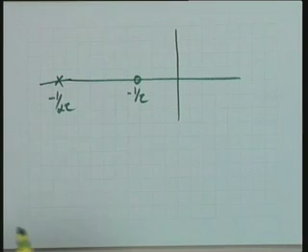Recall a lead compensator has both lead and lag as a pole-zero pair. In the case of a lead, there is a zero followed by a pole, and in the case of a lag, a pole followed by a zero, as far as the left half plane is concerned. Let me sketch this: a compensator zero, and at a sufficiently large distance, a pole. If I consider this to be 1 over tau, this would be minus 1 over alpha tau, with alpha less than 1. The transfer function of a lead compensator, call it d(s), can be taken as (s + 1/tau) over (s + 1/alpha tau), with alpha less than 1. Let me go ahead with the lead compensation; I'll come to lag compensation after that discussion is over.

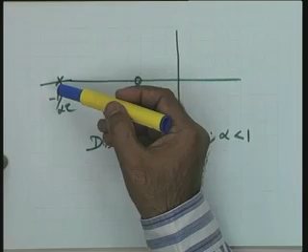We have seen in the root locus method how to place the zero and pole appropriately so that the transient performance of the system is improved. That was the objective. We used to pull the root locus towards the left so that it passes through the desired point, corresponding to the desired closed loop poles, which corresponded to zeta and omega n.

Now let us think in terms of the frequency domain. If zeta and omega n are specified, using second order correlations these indices have been translated to phase margin, MR, omega b, or equivalent indices.

In my examples, let me take phase margin, kV, and omega b as the three important specifications, and any other specification could be checked whether it is met. If a specification is not met, you have to enter the design cycle, take another trial point, and make the calculations again using that new trial point.

So now I want to go ahead with the design of d(s), that is, getting the values of tau and alpha so that performance requirements on kV, phase margin, and omega b are satisfied.

In addition to the flexibility on tau and alpha, I also have flexibility on the gain, since I can put an amplifier stage with the compensator. So instead of 2 parameters, we actually have 3: Kc, tau, and alpha.

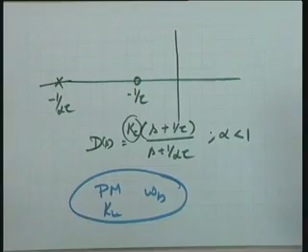As we did in the root locus method, I take the Kc parameter up with the uncompensated system, calculating its value as a parameter of the uncompensated system. Once Kc, tau, and alpha are obtained, at the realization stage I'll see whether Kc comes totally from the compensator or partially from the plant and partially from the compensator. That is just implementation. I have 3 parameters, and Kc I take to the uncompensated system.

In that case, I have a transfer function Kg(s), so that the K parameter is available there for adjustment, and a transfer function d(s), so that the parameters alpha and tau remain with the compensator. Since I am now working in the frequency domain, I write it as Kc(tau s + 1) divided by (alpha tau s + 1). This is more convenient for me. This is the gain Kc here.

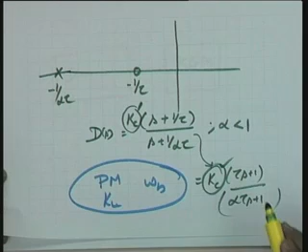I am writing the compensator transfer function in time constant form, because that is more convenient in the frequency domain. This Kc is not the same Kc as before, you can call it Kc dash - it's a different Kc. Still, I take this Kc along with the uncompensated system, so that as far as the definition of the compensator is concerned, it has 2 parameters, tau and alpha. Kc will be taken care of at the implementation stage. Therefore, Kg(s) is the plant model, and here is the compensator d(s).

And D(s) is now I am writing (tau s plus 1) divided by (alpha tau s plus 1), and here is my feedback system. Get me the values of k, tau and alpha so that the requirements on phase margin, bandwidth and kV, the velocity error constant, are satisfied, or any other error constant, it depends upon the type of the system I am handling.

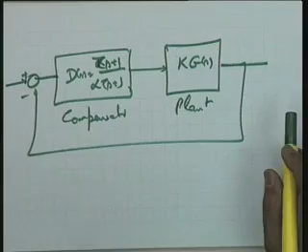So now first I will like to study the frequency domain characteristics of D(s). Just this very example will take us to the design algorithm as well. Let me write this as D(j omega) is equal to (j omega tau plus 1) divided by (j omega alpha tau plus 1).

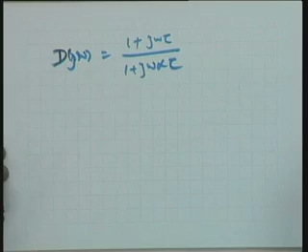Help me please, give me the magnitude and phase characteristics of this. Let us see how this is going to behave, what contribution this particular compensator is going to give to the Bode plot or the frequency plot of the uncompensated system. What contribution does it give, and what way are we going to design the parameters tau and alpha so that we are able to shape the frequency response of the total system.

So if I make the Bode plot sketch for this, this is omega, this is dB. Please see that in this particular case your magnitude is 1, so I go up to 0 dB here. What is the next corner frequency? It is omega equal to 1 by tau, and here is a corner frequency, omega equal to 1 by alpha tau. Which way do I go, plus 20 dB or minus 20 dB?

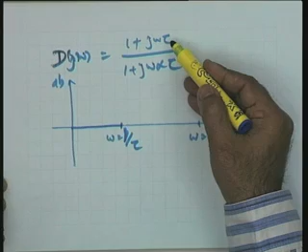It is plus 20 dB because this corner frequency is because of a zero. So I take this way up to this point, and then here it becomes horizontal because the pole adds up a slope of minus 20 dBs per decade. So after this point it is going to be 0 dBs per decade. So I have omega equal to 1 over tau, omega equal to 1 over alpha tau, and this becomes the magnitude characteristics of the lead compensator I have with me.

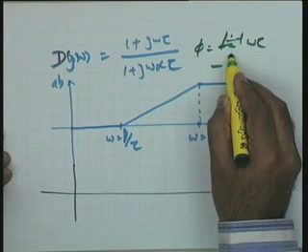The phase characteristics, let us see. Tell me please, what type of phase characteristics do you expect? Since alpha is less than 1, your phase angle phi is tangent inverse (omega tau) minus tangent inverse (omega alpha tau). This is going to be your phase angle, and therefore in this particular case the phase characteristics will be of this type.

Is it okay please? The phase characteristics in this particular case is of this type. This is your frequency here, the cutoff or corner frequency, and the frequency here. You will note this is your 0 degrees. Please note why the name lead compensator has been given to this. It adds a leading phase angle, here is a positive angle. It adds up a leading phase angle to the overall phase angle of the system you are designing, and this is the feature of the lead compensator which we are going to utilize in our design.

Well, couple of questions to you. Can you get me the frequency at which this angle is maximum? Let me say the maximum value is phi m, and the frequency at which it occurs is omega m. Let us try to get the value of this particular frequency. The couple of parameters which I will require in my design, I am taking your help to get those parameters.

Phi m naturally will come from this phase angle. So what I am going to do is, I will take the derivative of the phase angle with respect to omega, that will give me omega m. I will substitute this omega m over here to get the value of phi m. Okay, let us do that.

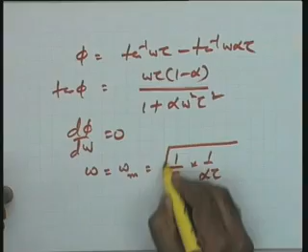I leave this simple expression to you to calculate. The value is 1 over tau into 1 over alpha tau, under the root. You please recall what is 1 over tau and 1 over alpha tau — these are the two corner frequencies.

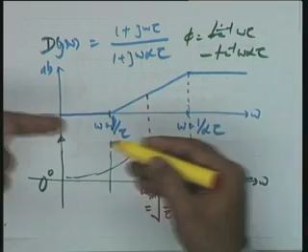So if omega m is equal to 1 over tau into 1 over alpha tau under the root, it means it is the geometric mean of the two. You may please see 1 over tau and 1 over alpha tau. The frequency at which the maximum occurs is the geometric mean of the two corner frequencies. It's easy to remember that way: 1 over tau is this, 1 over alpha tau is this, multiply and take the square root. This is the frequency at which the maximum occurs.

Now if I substitute this frequency in the phase expression, I will get the value of phi m, and let me arrange that phi m in this form. Sin phi m is equal to 1 minus alpha over 1 plus alpha. A simple calculation for you, please, to check.

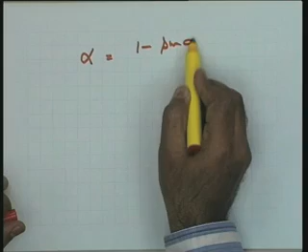Still, manipulation is needed because I am interested in alpha. This can be manipulated to get the value 1 minus sin phi m divided by 1 plus sin phi m. This is the value of alpha in terms of phi m. Phi m is the maximum phase angle, and I will be using this expression in my design. Please keep in mind how I got it.

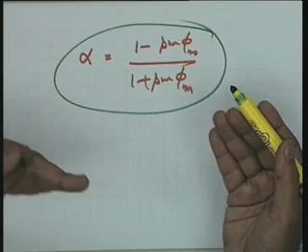I have taken the derivative of phi with respect to omega, and from there I got the maximum value of phi and the omega at which it occurs. The maximum value of phi in terms of alpha I get, and I have manipulated this to get the value of alpha in terms of phi m, because I know I am going to use the equation in this form for design.

Okay, so now please see, one more calculation I want to take up. Can you give me this value? Come on, take a little time. You can take a little time and get me this value, please. What is the value of this magnitude?

Yes, you see that as far as this factor is concerned, it is coming from 1 plus j omega tau from the zero. As far as this plot is concerned, it is coming from 1 plus j omega tau, and after this corner frequency, in the asymptotic plot you have neglected the 1. So can I say that this magnitude in dB is equal to 20 log of square root of 1 plus omega squared tau squared, and this has been approximated as 20 log omega tau only, because for omega tau greater than 1 I have neglected that 1 in the asymptotic approximation. So as far as asymptotic approximation is concerned, the equation becomes dB approximately equal to 20 log omega tau.

Now help me, please, what is the value here? Take omega is equal to 1 by alpha tau. So if I take omega is equal to 1 by alpha tau, this becomes equal to what? No, it will become 20 log omega tau, because this 2 is coming here.

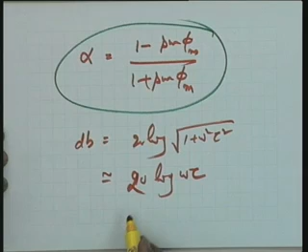So now if you take omega is equal to 1 over alpha tau, what is the value, please? 20 log 1 by alpha. Is it okay? So I get here the magnitude as 20 log 1 over alpha.

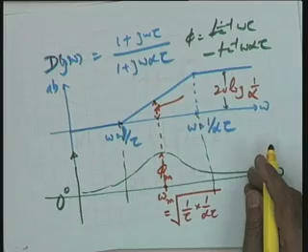Now, we have solved this. Give me the value of the magnitude at this point, please. The magnitude at this point. Yes, 10 log. Please all of you verify. If I substitute omega m, this value here, I get the magnitude at this point as 10 log 1 by alpha.

This is what I need as the information about the phase lead network, about this compensator, before I take up the design problem. I summarize the information now: this is a phase lead compensator. A lead network will give me this value. It's an RC network or an op-amp circuit that can be taken to give these characteristics. This provides the phase lead. The maximum phase lead occurs at omega m, which is the geometric mean of the two corner frequencies, and the maximum phase lead is related to the parameter alpha, and this relation is given by this.

At this particular frequency, the magnitude is 10 log 1 by alpha. This is the magnitude, and the maximum value you are getting is 20 log 1 by alpha. Keep this in mind. If this is well set in your mind, the design problem will quickly follow. There will not be any problem at all.

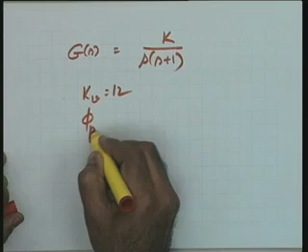Okay, as a design problem, let me take a situation of a type 1 system. Your uncompensated system Gs is equal to K over S into S plus 1, and the requirements are Kv equal to 12 and phase margin equal to 40 degrees. There may be additional requirements on bandwidth as well, that we will check, but let us first meet the requirements on phase margin and Kv.

Now you see the steps, please. The steps will follow easily from this example itself. I am not listing the steps, I will save time here because the example will make the steps very clear. The very first step I want to take.

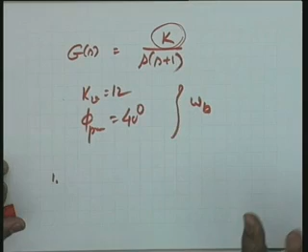Okay, you design your K so that your Kv requirement is satisfied. Please give me the value of K to satisfy the Kv requirement. Then the value of the compensator Ds I am going to introduce should not change the Kv of the system. That we have to keep in mind. Please help me, what is the value of K I should take to satisfy the Kv requirement?

12. And how about the effect on Ds? Please tell me, whatever Ds you take, will it change the value of Kv? Keeping in mind that your Ds is tau s plus 1 divided by alpha tau s plus 1, it will not change. Please see, your Kv will not change.

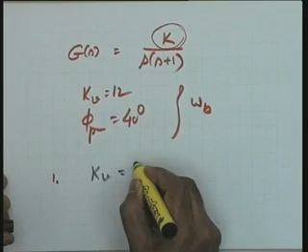That is why your Kv is set once for all, and I am taking in this example K equal to 12. So one parameter is decided by Kv. So this decision I have taken on Kv. Now I have to take the phase margin decision, and therefore I need the plot of the uncompensated system first.

Gj omega equal to 12 over j omega into j omega plus 1. This is the value, and now please make a rough sketch. You know how to make it. 12 by omega will be a line of minus 20 dBs per decade, and this is a pole which will add another line of minus 20 dBs per decade. So this becomes the magnitude plot of the uncompensated system, with this as a minus 20 dBs per decade slope and this as minus 40 dBs per decade slope, and you know that this corner frequency is omega equal to 1.

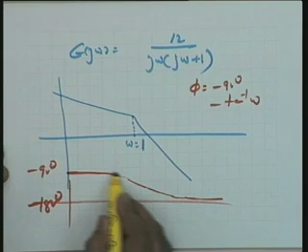And I can make the phase angle plot as also. For this particular case, the phase angle, as you know, is minus 90 degrees minus tangent inverse omega. I am giving you the rough phase angle plot. At this frequency I want to get certain phase margin. So this is the phase angle plot. As you know, it will be tangential to minus 180 degrees axis. It's clear from here, it's a type 1 system which will be tangential on this side to minus 90 degrees axis and on this side to minus 180 degrees axis. So this becomes the phase plot for me for this particular system.

I hope this is clear. As far as the uncompensated system is concerned, I have got the gain plot and the phase plot, the Bode plots, that is the semi-log paper plots I have got. Now let me see the phase margin of this system.

I have got the data in my notes. The phase margin in this particular case is equal to 15 degrees. So it is short by how many? By 25 degrees, you see. I need 40 degrees and this is 15 degrees, so it is short by 25 degrees.

Now you see the adjustment, please. As I told you, if you get this example very well, the procedure will be well set. Now what I can do, you see that this is your plot of the lead compensator, and if I cascade a lead compensator, the two plots will get added up because of the Bode characteristics. Because of the Bode characteristics, you see, the two plots will be added up. Now you please notice this point very carefully.

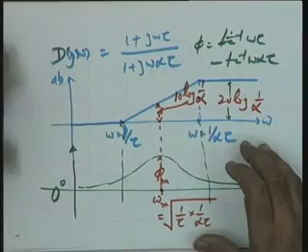What I can do is that place this, please, you are disturbing me. Gentlemen, you are disturbing me, please. My attention gets diverted. Don't speak, please.

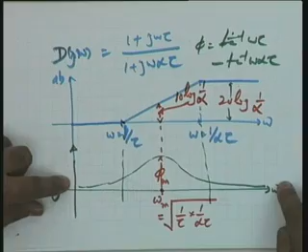This omega m is the frequency. So this particular thing, this magnitude, I want to have this phase lead. This phase lead I can place at this particular point, please. You can just see this phase lead I can place it. So it means what I can do is that this omega m can coincide with this point, and I can design my system in such a way that phi m is equal to 25 degrees, my phase margin will be realized. Anyone who can think of the problem involved in this, please? Think of the problem involved in this.

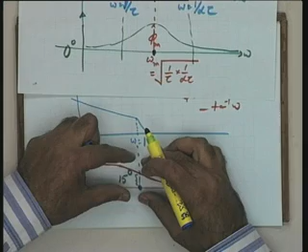Phi m, I am placing phi m here. The maximum phase value is equal to 25. In that particular case, the net angle at this particular point will become 40, which is the desired phase margin.

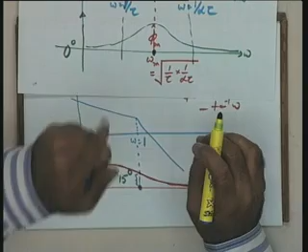But I envisage a problem. If I do this, I fear that the phase margin will be less than 40. The reason? Could you think of the reason, please?

Yes, please see that. When you are adding this phase at this particular frequency, you are adding the gain as well. And if you add the gain to this, the crossover frequency is getting shifted to the right, not to the left. You see, if you add phi m at this particular point, the magnitude gets added to it and the crossover frequency gets shifted to the right.

What is the consequent effect? The consequent effect is this: because, suppose it gets shifted to this point, tentatively let us say, you have calculated your 25 degrees hoping that the uncompensated system is providing 15 degrees to you. But now since the crossover frequency gets shifted, the contribution of the uncompensated system has reduced from 15 degrees to a value you do not know exactly, since it's a trial and error design. You can approximate it roughly to 5 to 10 degrees.

So in this diagram, haven't you marked incorrectly? It should be from the crossover. Oh yes, I am sorry. You are very right, yes. I have taken the corner frequency here.

This is 15 degrees. The gain crossover frequency of the uncompensated system is this, and you want, let us say, 15 degrees. This will get shifted because of the addition of the total magnitude, and therefore the contribution of the uncompensated system will reduce.

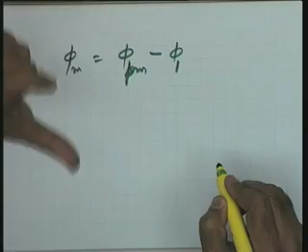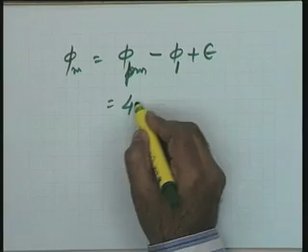Okay, and therefore I can say phi m, the required phase lead, is equal to phi pm, the required phase margin, minus phi 1, the phase angle of the uncompensated system, plus epsilon, the safety margin. Will it do? Phi m, the maximum phase angle I require, is equal to the required phase margin minus the phase angle of the uncompensated system plus the safety margin. That is why I am writing here 40 minus 15 plus 5 equal to 30 degrees.

Okay, so this 30 degrees of phi m I require, and hence I can get the value of alpha now. You see, one parameter is set. You will see from this design the statement I made: the frequency domain design is very powerful, because the type of trial and error you made in the root locus design, that much trial and error is not involved here. So by this adjustment of this phase angle, you have got one parameter alpha of your compensator. K you have already got from kV.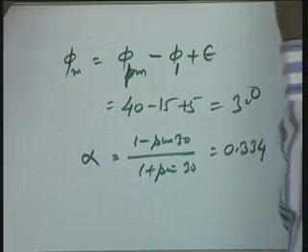Now alpha I get equal to 1 minus sine 30 divided by 1 plus sine 30, which is equal to 0.334. This is the value of alpha I get. The only parameter left is tau. Now, if anyone has got an idea how to fix up tau, please? Yes?

Omega m should coincide with omega gc. But which omega gc? This new omega gc. How do I know what is the new one?

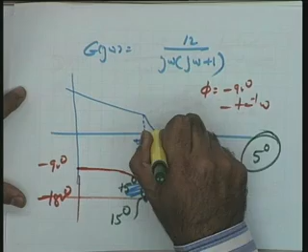By shifting the 1 slope by... not 20, but this value: 10 log 1 by alpha. Because at the maximum phase angle, it is 10 log 1 by alpha. This much of magnitude would be added at omega m. This point may please be noted.

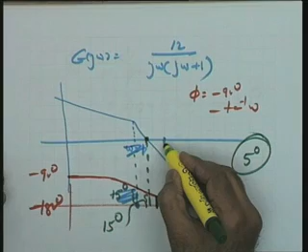And the value 10 log 1 by alpha is 4.8 dBs. So what should be the point? I envisage that the new crossover frequency will be at the point where the uncompensated system has a gain of minus 4.8 dB, because 4.8 will be added to it.

So this is the new gain crossover frequency. The uncompensated system should have minus 4.8, so that when 4.8 gets added to it, it will cross the 0 dB axis, and this will become my new gain crossover frequency. Now you have got the clue. The uncompensated system plot is already with you, so you read off this point at which the magnitude is minus 4.8 dB.

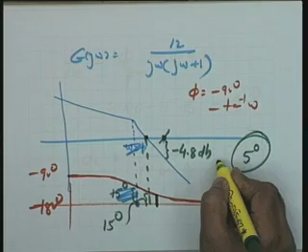As per my notes, it is 4.6 radians per second. So I now get the value of tau from this expression: let omega m equal 1 by tau into 1 by alpha tau, under the root, equal to 4.6 radians per second.

This will give me the value of the tau parameter. The final result turns out to be tau equals 0.376 seconds. So this is the value of tau, and ds, 0.376s plus 1 divided by 0.128s plus 1, is the value of ds I obtain.

Now, from the point of view of examination, don't leave your answer like this because you have made a guess. You do not know whether that guess was satisfactory or not, and therefore you make a compensated plot, at least a couple of calculations to check the phase margin.

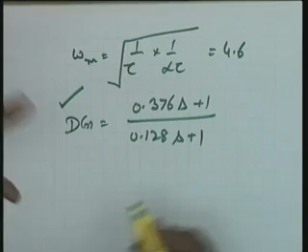For KG(s)D(s), this is the system now. What is the system? K was 12, into 0.376s plus 1 divided by s into s plus 1 into 0.128s plus 1. This becomes your open loop compensated transfer function of the compensated system.

For this particular system you can now make the Bode diagram and get the phase margin. Please note, the entire phase angle curve will not be required. You just see the crossover frequency: is the cutoff frequency equal to 4.6 which you have calculated? If yes, calculate the angle, that gives you the phase margin.

So you have to optimize. Don't curse me later if the problem turns out to be lengthy. You have to optimize on the time, see what is the total effort you require in solving such a problem, and don't make an effort more than that so that you can evenly distribute the time.

In this particular case, for example, a check is required. Now you need not give the second trial, but at least you should say that your epsilon value turned out to be wrong, and you will like to do it now by taking epsilon larger. If phase margin turns out to be more than 40 degrees, there is no problem - 42 degrees, 43 degrees, it is fine.

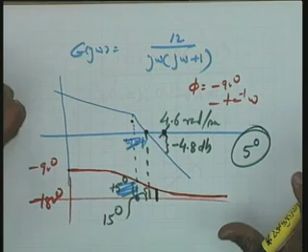If it is satisfied, your design problem is complete. If not, comment on it appropriately as to what will be your next design trial, whether you will like to increase epsilon, reduce epsilon, what you are going to do - that you have to comment on properly. Any question on lead compensator design, please?

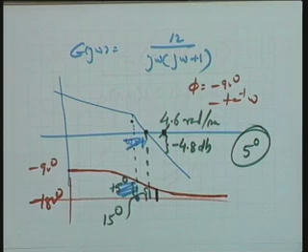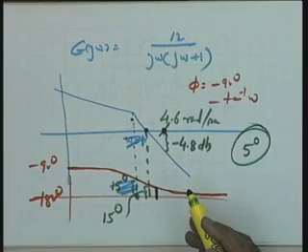And so we work with the asymptotic plot only? No, I am making that clear here. If you are working with the asymptotic plot, I don't mind, provided you have taken enough care that your final check will give me the required phase margin. It is fine if you think you will take an asymptotic plot, but keep sufficient margin on epsilon, don't make it too much. Suppose you take epsilon equal to 20 as was suggested, then the bandwidth requirement may not be satisfied. It is up to you whether you make an asymptotic sketch or take care of the errors also.

I don't think making errors is a big thing because no calculation is involved after all. You can incorporate the errors and make the actual plot immediately. Now I go to the lag section or the lag compensator.

You recall from the root locus sketch, what was our lag compensator? A pole here and a zero. Close by. So if I take it, D(s) could be written as, yes, in what format should we take it? Let me see.

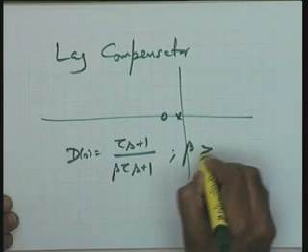Tau s plus 1, I am taking in this format: tau s plus 1 over beta tau s plus 1. Naturally, in this particular case, beta will be greater than 1. The constant k, similar argument, I am not using here. The k has been transferred to the uncompensated system. So this becomes the transfer function of a lag network or a lag compensator: tau s plus 1 divided by beta tau s plus 1, with beta greater than 1.

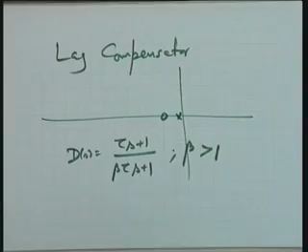Let me see its frequency characteristics. Similarly, the frequency characteristics I am going to use. So up to what will be the first corner frequency? Omega is equal to 1 by beta tau first.

And how about this, this is a pole. Since it is a pole, I am making minus 20 dB per decade here. And then a zero, plus 20 dB per decade. So naturally it becomes 0 dB here. And I have here omega equal to 1 by tau. So this is omega versus dB.

Omega versus dB. Now let us see the phase angle, please. Phase angle in this particular case, obviously, as you see, the angle will be lagging because beta is greater than 1. So let me take a sketch over here. Omega, phase angle is lagging here.

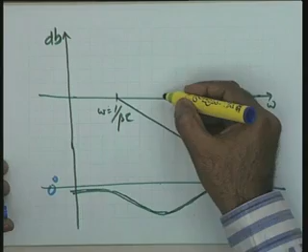Okay, now here, before I go ahead, though the calculations for this is 0 degrees, though the calculations for maximum phase lag and the frequency at which it occurs can be made. This magnitude, let me write first quickly, 20 log beta, it can be checked.

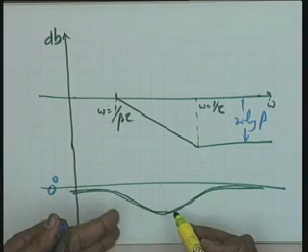Though these calculations can be made, let me make one comment here: the lagging characteristics of the network will not be utilized for compensation. Rather, it is a drawback, and we will like to see that the lagging characteristics does not give negative contribution to the system. What I am going to use is this particular negative magnitude of the lag network for compensation, and hence I am not interested in marking phi m and the corresponding frequency here. This point may please be noted. This region of the compensator is not going to effectively contribute to the compensation I am going to take up, and therefore these magnitudes I am not taking.

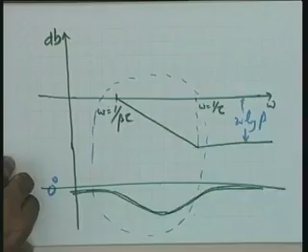Now let us see how we handle such a situation. I am claiming that the phase lag, it is called lag compensator because of the phase lag network, but in frequency domain design the lagging characteristics will not be utilized, as you will yourself appreciate when I take a numerical problem. I think I can straight away go to the problem and keep this characteristic in mind, and we will use this magnitude characteristics to get the appropriate value of the phase margin and the bandwidth or other requirements if imposed. I take a problem here.

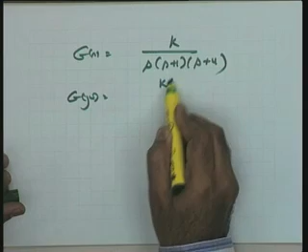G(s), this is not working. G(s) equal to K over S into S plus 1 into S plus 4. The problem we had taken up in the tutorial class. Okay, now in this case, let me say that G(j omega) I want to get in time constant form. So it is K by 4, it is j omega plus 1, 0.25 j omega plus 1.

For this problem, it is given that I require the phase margin equal to 43 degrees, I require the bandwidth equal to 1.02 radians per second, and I require Kv greater than equal to 5. These are my requirements. My design procedure will be the same.

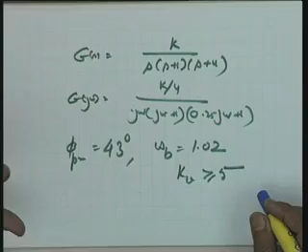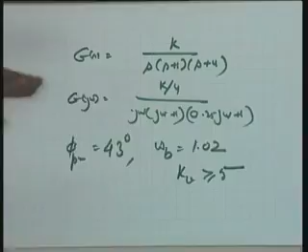I will first satisfy the Kv requirement by assigning a suitable value to k. Then I will take care of the phase margin. After that I will go to the Nichols chart to check the bandwidth. If it is not satisfied, I will re-enter with appropriate knowledge obtained from the Nichols chart. This tuning or readjusting knowledge will be given by the Nichols chart as to whether bandwidth is large or small, whether I can play with this, and if, as the question was there, if all the requirements cannot be satisfied, then a lag section and a lead section together will meet my requirements on phase margin and bandwidth.

Okay, so now, please help me, what is K equal to? K is equal to 20 and Kv is equal to 5, naturally will be given by that. Is it okay, please? So in that case, I write G(j omega) for the uncompensated system.

Since K has been clubbed with the uncompensated system, it is 5 over j omega plus 1, 0.25 j omega plus 1. Come on, make a sketch, please. I am making asymptotic here to save time, but you can use the errors as well. So this is minus 20 dB per decade. One corner frequency omega is equal to 1 and one more omega is equal to 4.

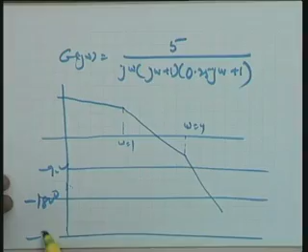Omega is equal to 4 here, omega is equal to 1 here, and I have the corresponding phase angle plot here. Help me please, what are the asymptotes? I think you will recall the asymptotes we had taken for this, minus 90 degrees and minus 270 degrees. So let me draw a line for minus 90 degrees here, a line for minus 270 degrees here, and a suitable curve will come. Let me see what is the phase margin. So accordingly I will plot the curve over here.

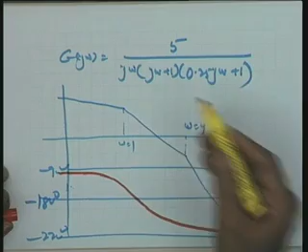This is the phase angle I make for this particular system. Minus 90 minus tangent inverse omega minus tangent inverse 0.25 omega. I can write here minus 90 minus tangent inverse omega minus tangent inverse 0.25 omega. This becomes my phase angle curve.

This is the gain crossover frequency, and at this particular point I find the phase margin to be minus 4 degrees. So it means for this particular K value, which meets your steady state requirements, the system has become unstable. However, when I add a compensator, the stabilization naturally will come. The phase margin in this particular case turns out to be minus 4 degrees. See that this is dB on this side and omega, here it is omega and phase angle.

Now make the adjustments please. I think take up this sketch and see what type of adjustment I am going to make in this case. If you look at this red line, which is the phase angle curve, please see if I am able to pull the high frequency region down, it is possible to increase the phase margin, isn't it? If I pull the high frequency region down so that the gain crossover frequency shifts to the left, then the phase margin will be improved, will be increased.

One observation here itself should be clear, that the lag compensator will always reduce your bandwidth, while the lead compensator is going to increase your bandwidth. Is it alright please? Because with the lag section you are pulling this down in the high frequency range. It means the gain crossover frequency is reducing, and I told you that the gain crossover frequency reduction leads to reduction in bandwidth, increase leads to increase in bandwidth, and therefore the lag compensator is going to reduce the bandwidth while the lead is going to increase the bandwidth. This point may help you in taking the decision whether for a given design problem you are going for a lead compensator or a lag compensator.

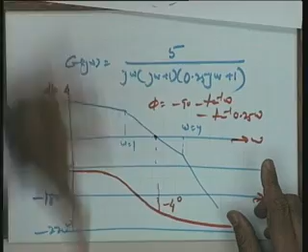Check the bandwidth of the uncompensated system. If you find that the uncompensated system bandwidth is, with respect to the required bandwidth, an increase or decrease is required, you can find. Note that if an increase is required you cannot simply go for a lead compensator. You can see that if it increases, will it approximately lie within the range required. Please see that it's not an absolute answer, that if the required bandwidth is larger than the uncompensated bandwidth go for the lead, if it is smaller go for the lag. No, you have to see, you simply know that your lead compensator will increase the bandwidth.

After the increase, is it expected that it will lie within the acceptable range? If it is expected, you can try the lead compensation. Similarly, for the decrease, if it is expected that after the decrease it will still lie in the specified range, you can go for the lag compensation. So it is only a guideline, and you have to take a suitable clue from here as to whether your trial is going to be a lead compensator or a lag compensator.

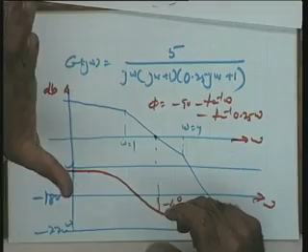So in many cases, if both the phase margin and the bandwidth requirement are not satisfied, what do you do in that case? First you design the lag section, because the lag section will meet your phase margin requirement, and then you add a lead section to meet the bandwidth requirement, because the lead section will increase the bandwidth. So in that case, one can divide the phase margin requirement to be compensated. You can split that into two parts, because you know that the lead compensator also provides a phase lead. So you can really split the requirement of the phase margin into two parts. Let us say you require 60 degrees.

If you compensate it totally by a lag compensator, what will happen? The gain crossover frequency will have to come deep into this side. It means the bandwidth will be drastically reduced if you compensate it totally by the lag section.

But if you say, okay, I will require a lag section only for 30 degrees, what will happen? It will slightly go down for 30. So 30 degrees phase margin can be obtained by the lag compensator.

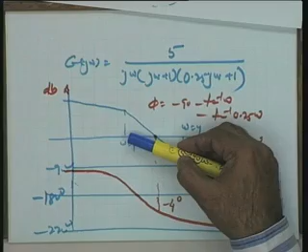The remaining 30 degrees, you treat the lag compensated system as an uncompensated system for the design module of the lead compensator, and provide an additional phase margin of 30 degrees. The gain crossover frequency will also shift, and hopefully the bandwidth requirement will be met. It's a trial and error procedure.

You try and get the values of both lead and lag. You will recall in the root locus section, our practice was to first design the lead section and then go for the lag. That is, first you meet the transient response, and then you design the lag section so that it does not disturb your root locus plot.

Here it is this way: you first design the lag section, partially meeting the phase margin requirement, slightly decreasing the gain crossover frequency and hence the bandwidth. Then design the lead section, meeting the remaining phase margin requirement and hopefully increasing the bandwidth to the desired value.

Therefore, now I switch back to the lag section procedure. Now you can help me please. What shall I do? Let me first of all get the frequency at which the phase margin is how much.

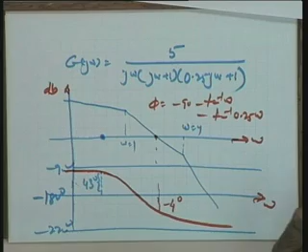I need 43 degrees. Let us say that this is the cutoff, or this is the gain crossover frequency at which the required phase margin of 43 degrees will be obtained. Is it all right? This is 43 degrees.

So now what do you want? You want this particular plot to be shifted down by this much of dB. I need your attention please here. This much of dB, the idea should come from you.

This much of dB if I add, because it's a log plot, it can be added, so that the total plot comes down, the crossover frequency is given by this point, and hence a phase margin of 43 degrees will be realized. Let us say that I match this frequency at this particular point.

Intuitively I am saying, what are the problems involved in it? If I match this, I will like to put it at this point. Why, and not at this point?

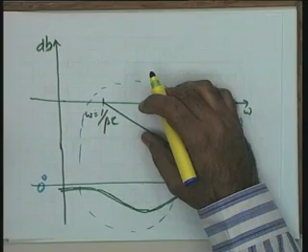Because let me give the maximum attenuation at a time. Why do I give the partial attenuation? This is the maximum attenuation possible. This is the maximum dB by which I can bring it down. So naturally I will be interested in this region.

The only thing is this, that this region extends from omega equal to 1 over tau to infinity. So what point should be taken? That is important. Can you give me some clue here? What point should be taken? I mean, give me some qualitative idea.

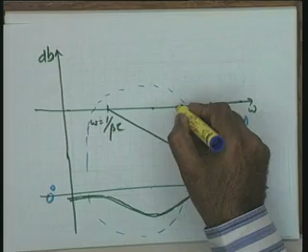Should it be omega equal to 1 over tau? Or should it be a very, very large value? Or it can be anything. That is the idea I want.

The idea is fine. But with respect to the phase angle, just see please. You know that again you have taken 43 degrees without the contribution of the phase lag. In this case it's a lag, it's a negative contribution.

So let us say if you take it at this point, this much of phase lag will be added. So it means the 43 degrees which you have taken, you will not be able to obtain — it could be 35 degrees.

So one thing is there, that it could be 30, even less, you see. My plot is not accurate. So at the corner, it's a substantial phase lag at the corner frequency. My plot is not to scale. It's a substantial phase lag at the corner frequency.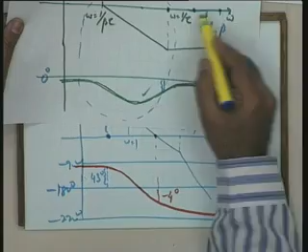So the clue could be, why don't you take it very far away? If you take it very far away, in that particular case, what will happen? The value of omega in this case will be there, but 1 over tau and 1 over beta tau, which you are going to realize using RC components, you will not be able to get appropriately.

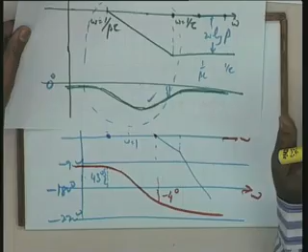It is the realization problem that you want, that 1 over tau and 1 over beta tau should be proper, and that demands that 1 over tau should not be taken very far away, because in that particular case the realization problem comes. And there are no quantitative guidelines.

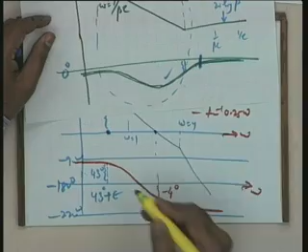The qualitative guideline is this: if this particular point at which it is 43 degrees, instead of 43 degrees you take it 43 degrees plus epsilon, assuming some phase lag will anyhow be added. In this particular problem, I have taken epsilon to be 12 degrees, so I want to take a point at which it is 55 degrees and not 43 degrees, and I find that point in my notes.

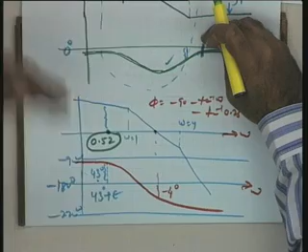That point is given as 0.52 radians per second. So please note, I have taken care that the safety margin should be taken for this phase lag, and again there is no quantitative guideline. You have to get the appropriate value by trial and error. A very large value should not be taken, for obvious reasons, because your bandwidth will reduce drastically.

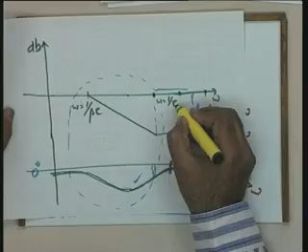In this case 12 degrees I have taken because this is the final design, and at 55 degrees the corresponding value is 0.52. The qualitative guideline is that this frequency should match approximately the frequency of this 1 over tau point you have taken. You place this particular point about 2 octaves below this point—that is, you take it divided by 4.

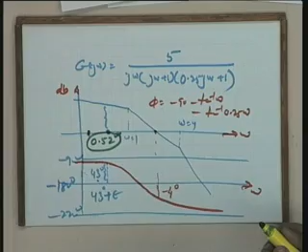This is again just a qualitative guideline. It may or may not work, but mostly it works. This is 0.52, so it means you place this frequency, which is the corner frequency, 2 octaves below this point. This point you already know is 0.52. Now you have got the answer: 1 over tau equals 0.52 by 4.

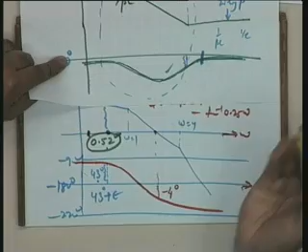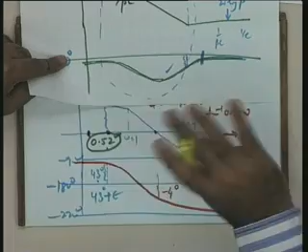That divide by 4 is a qualitative guideline to you. You may like to take 1 decade below—different guidelines depending on the problem and depending on your experience. If you are working with CAD software you may try different viewpoints, but the procedure should be well set. I take 2 octaves in this example to give you some numerical answers.

So I now take 1 by tau equal to 0.52 by 4, and therefore one parameter is set in this particular case. Now how about the other parameter? Help me please, how do I get the other parameter?

The other parameter should come from this. This much of attenuation, this much of minus dB you want, should equal this value. 2 octaves below you have already taken, so this point is already available to you. What is this point? Let me take it: it is 0.13. Oh, it was so obvious.

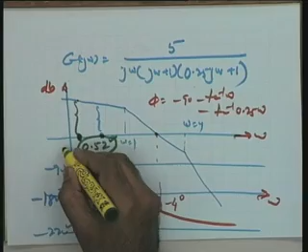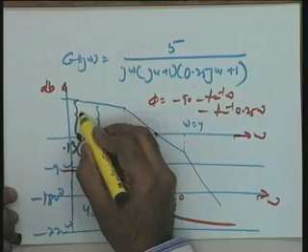It is 0.13. So at 0.13 you read off the value, and this, as per my notes, is equal to 20 dBs. So it means you want this much attenuation, and therefore I get the other parameter: 20 log beta should be equal to 20, which gives beta equal to 10, and hence both parameters are available.

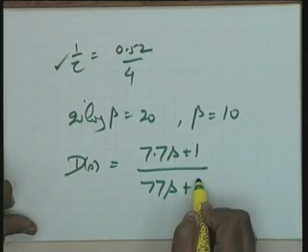The total design in this case is Dc equal to (7.7s plus 1) divided by (77s plus 1), with beta and the other parameter available to you.

And now all the other comments are identical to the first case. That is, you cascade your Dc to the uncompensated transfer function, get the Bode plot of the overall system, and see that the effect of the phase lag—that is, the value of epsilon appropriately taken—allows you to get the required phase margin of around 43 degrees.

And one more check, and that check is of the gain crossover frequency—the check is that of bandwidth. If there is a slight variation required in the bandwidth, adjusting epsilon may help you meet it. But if there is a big gap between the bandwidth acquired and the bandwidth desired, then it is an indication that you should treat this design as an uncompensated system and go ahead for the lead section, so that the total lag-lead compensator is available to you.

And I think with these examples, I have conveyed the procedures, and I hope the procedure is clear. And with this, we close our discussion of this particular course.